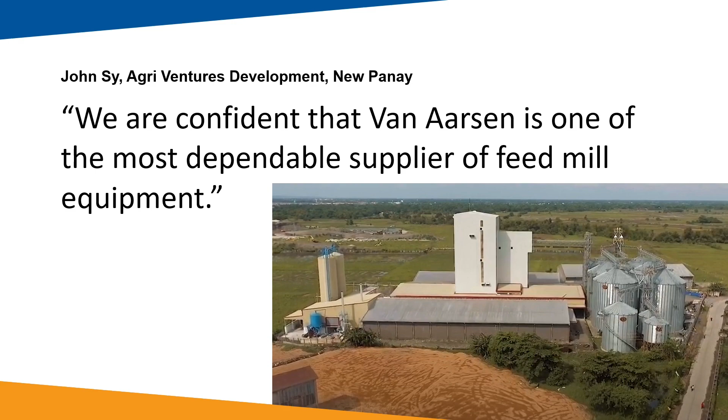For Van Aarsen, research and development is crucial, and it's in our core, it's in our DNA, as mentioned earlier, and it ensures we constantly are up to date on technical, nutritional and animal welfare developments.

With me is Harold Schroijen, Area Sales Manager South, Central and Eastern Europe, with over 20 years of experience at Van Aarsen. Together we will have a look at the latest changes, updates in the portfolio of Van Aarsen. Harold, welcome. Thank you. Can you tell us how we extended and adapted our portfolio?

That's the question. In the feed milling market, we don't see many changes with completely new developments. But due to pressure on price, use of alternative raw materials, developing markets, use of energy, but of course also on product quality and animal health, we as a solution provider have to keep on developing, not only to meet and support that market from our clients, but also be ahead of it.

So that means not only thinking along with the clients to enable them to produce their feed in the most efficient and most economical way, but also we need to meet their demands and take them as our starting point. That's thinking along with the clients. They need optimized feeds, animal feed conversion rates, and they need to have the right feed according to the animal's needs in every life stage.

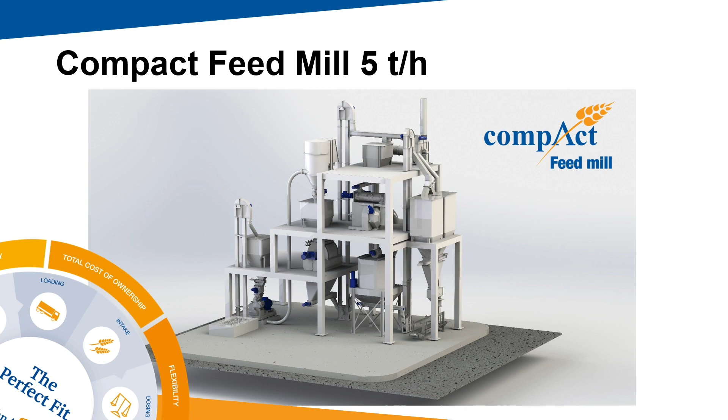So next to that standardized equipment inside, we also have some extra standardized options to make it custom for each client and every product demand. Due to that detailed execution and a bolted construction, it is also designed to be able to relocate it. So if it turns out, for example, when the sales market is reacting positively in that area, and it justifies a bigger feed mill, then you can relocate it to a new location.

Or when the opposite turns out, that it has become clear that another location should be the better one for this, you can easily relocate it again. But of course, when it turns out that it's a keeper, there is also still the possibility to enlarge the capacity because it's not limited by its own design.

And it looks compact. To get a grasp how compact it is, do you know some height or footprint by heart?

Good question. It fits in a warehouse. Let's say the 5 tons an hour, it's about 12 meters of height, so that's really low actually. And I think the 10 tons an hour would fit in a 19 meters high building, so that's also not that big for a 10 tons capacity feed mill.

Yeah, indeed, that's why it's called compact feed mill. Correct. So from this total solution we offer, let's talk about some process solutions.

And in the heart of every loved feed mill, the hammer mill beats. Let us have a more elaborate look at the grinding process. Yeah, that was nicely said about that hammer mill that beats in every heart.

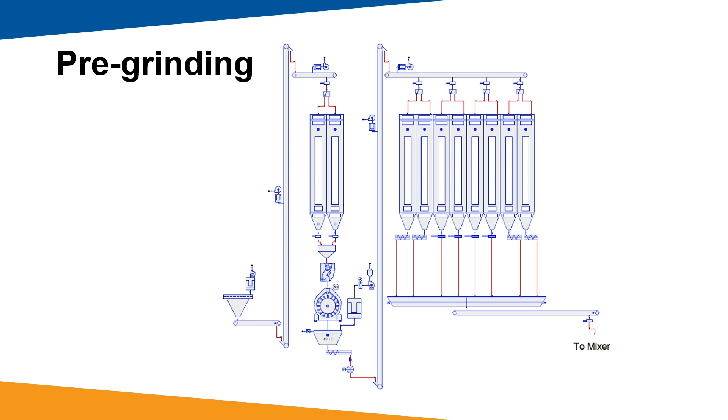So if we look at that in general, we have possibilities. Let's say in a pre-grinding setup of a feed mill, we have the possibility to grind on components particle size, and we can combine everything we need on nutrients value. But in a post-grinding setup, which is actually most used in the market, we don't have that possibility in a normal way because everything is dosed in a batch and ground on the same screen.

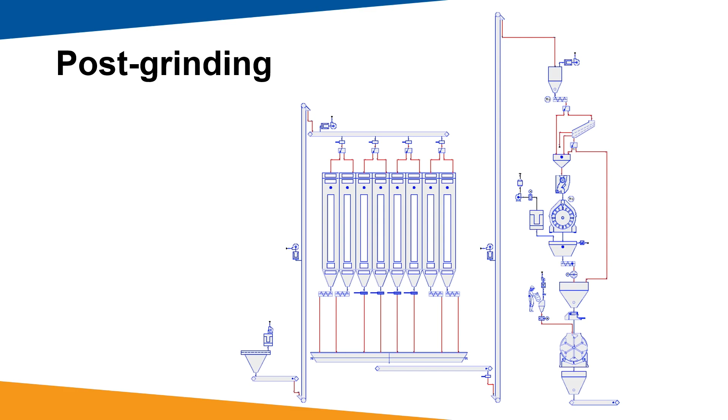So to be able to combine the best of both, Van Aarsen developed a third option, called split grinding. In short, split grinding means we take the advantages of both: from pre-grinding, the single product grinding, and on the other hand, we can still do that in a post-grinding setup, with its own advantages of combined grinding on that hammer mill. So we have two options in that split grinding, depending actually on available space, but also on investment possibilities.

And the nice thing is we do that in that post-grinding setup, and the only thing which is different is the unloading bin under the dosing weigher and the use of the automatic screen exchange on our hammer mill. So that takes us to the split grinding, where what we actually do is split up each recipe into two separate sub-batches.

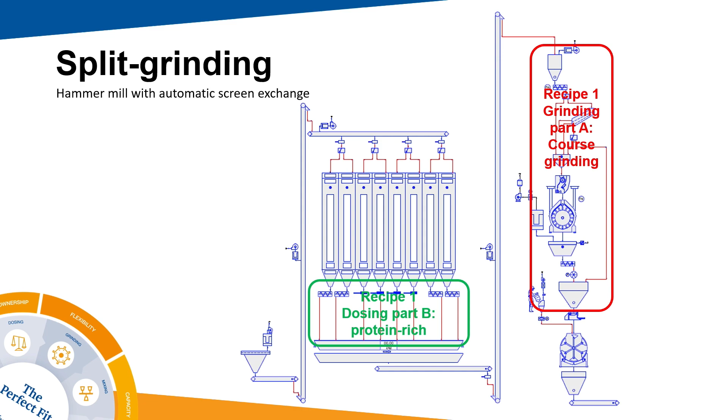And we send them one by one to the hammer mill within the same normal batch time. So first we combine from a recipe in a dosing weigher all the carbohydrate-rich products into a sub-batch, and we send it to the hammer mill with a big screen for coarse grinding. Meanwhile, the protein-rich components are being dosed, and in the time between the two batches, the automatic screen exchange switches screens for the fine ground product. So you don't lose any time in this.

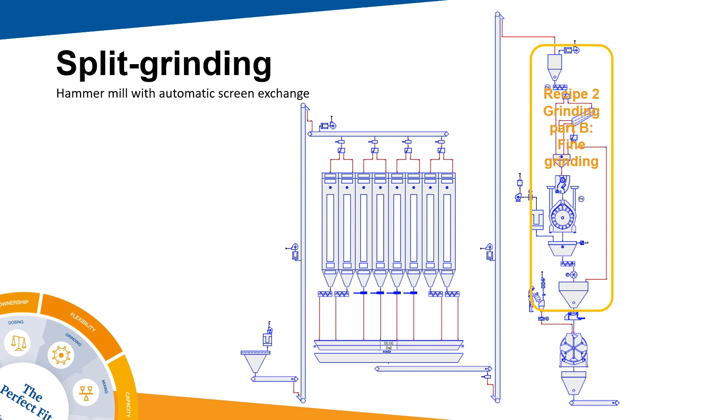And in the following bin above the mixer, both sub-batches come together again and will be mixed homogeneously. So normally you have, let's say, a 6 minute or 5 minute batch time, and here it will all be combined in two sub-batches, still having that same batch time of 5 minutes in total. So the nice thing about that split grinding setup is that it fits in a lot of cases, and it can be done in an existing situation basically with the use of that automatic screen exchange.

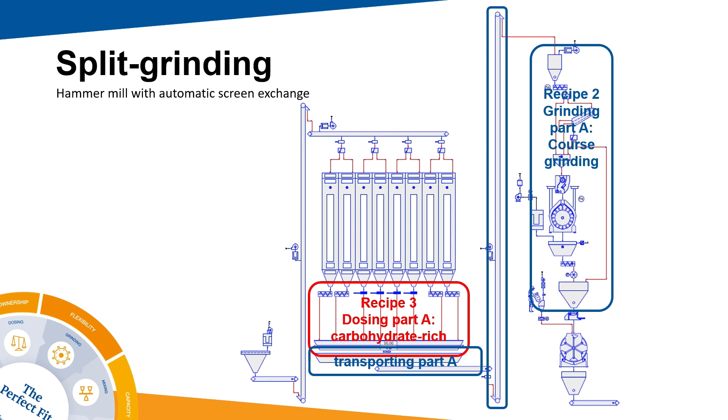So as we see here, only the setup with the automatic screen exchange. The second option is to use the automatic screen exchange or the hammer mill for the protein-rich components, and the roller mill for the carbohydrate-rich components. Investment costs are higher, but still the sub-batches are used, so functionality stays the same.

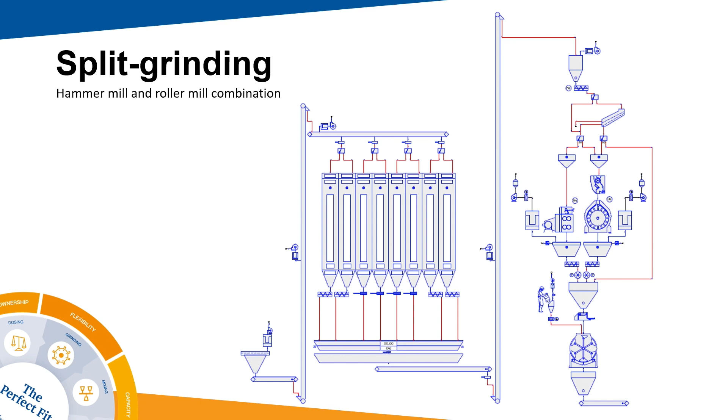I understand the advantage of this for the nutritional value of the feed. But I can also imagine this split grinding setup is not for every feed miller. Do they have to do something? Does it mean there are no options for them in terms of split grinding?

Yes, of course, still there are. And I also know split grinding cannot be done for every feed mill, not for every feed miller, but this is a nice option to have. And it is also possible to adapt in a normal post-grinding setup.

But also with a normal post-grinding setup, you have possibilities by using that hammer mill with the automatic screen exchange. So let's say they need flexibility. In a time where each farmer would like to have a separate feed for his animals in a certain life stage, flexibility is a must.

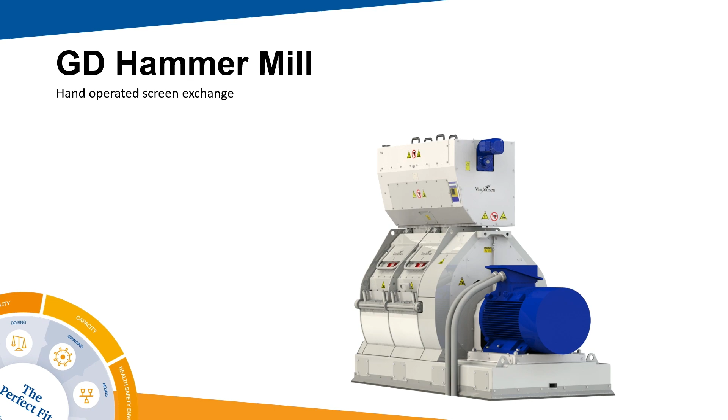So with that automatic screen exchange, we can serve that. The only thing is that we need to put it on. And if we have a standard hammer mill and we would like to adjust it with an automatic screen exchange, that is possible because its footprint stays exactly the same.

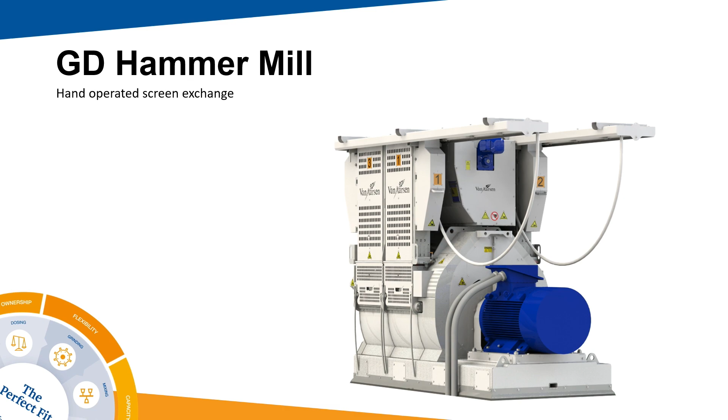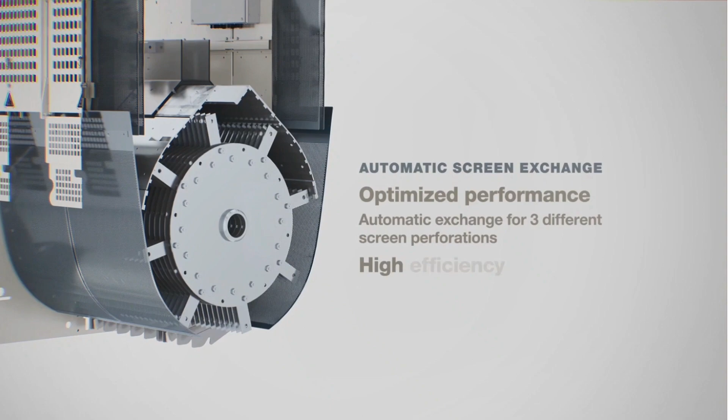The same footprint, the same height, and you can continue working with it in a very flexible way. That automatic screen exchange has 3 screens coming from the top, recipe controlled. That means within the batch changing time, you don't lose any production time with it. It's always the preferred screen perforation, getting the optimum nutritional value of the feed for its animals. So it's 100% flexibility to your clients.

So also here, for normal post-grinding systems, if you use a hammer mill with that automatic screen exchange, you combine it with a frequency controller on the motor, and you have a sieve, for instance, on top of the hammer mill. You also have perfect possibilities for structure grinding, even in a post-grinding setup.

Okay, but some feed millers might say, I combine my recipes on one screen and the operator is there anyway, and I don't need it, and I don't change the screen that much or that often. I can imagine that's said. I also hear the story sometimes, but I know also for sure that if you don't need to think about all these points, life will be a lot easier and quicker, also because it's easier and you have better results in more precise grinding products.

So think of only the capacity increase if you don't lose any time by switching the screens. And even switching the screens only once will take, let's say, 10 minutes. So let's make a careful calculation, but simple, but careful. Let's see.

If you have a grinding setup and you only shift it once every 2 hours on a 24-hour production day, that's not that much. So 12 times 10 minutes you earn is 120 minutes, is 2 hours of extra production time. That's really a lot. And if you then imagine that the capacity of the hammer mill will be 40 tons an hour, then you gain 80 tons per day of extra product.

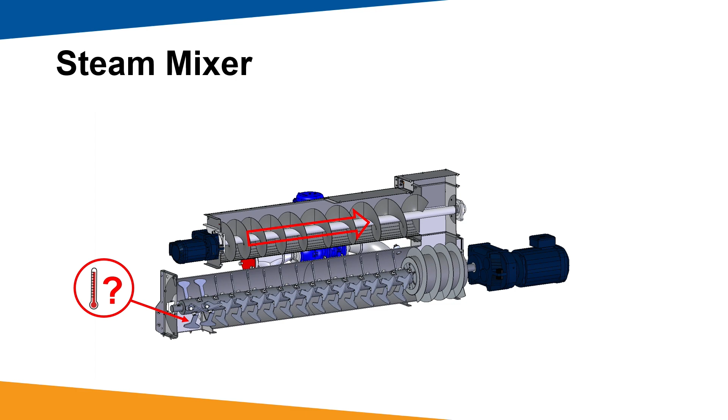Let's check the fast product changeover. The final product from one batch is coming down from the dosing screw to the pellet mill, while in the second pellet mill bin, the next recipe is already waiting for the signal to start. What we see is that the product entering the steam mixer, because there is no intelligence in the steam dosing, the first product most probably will be too wet, because steam dosing is starting too early, or it's too dry. Both options are not preferred.

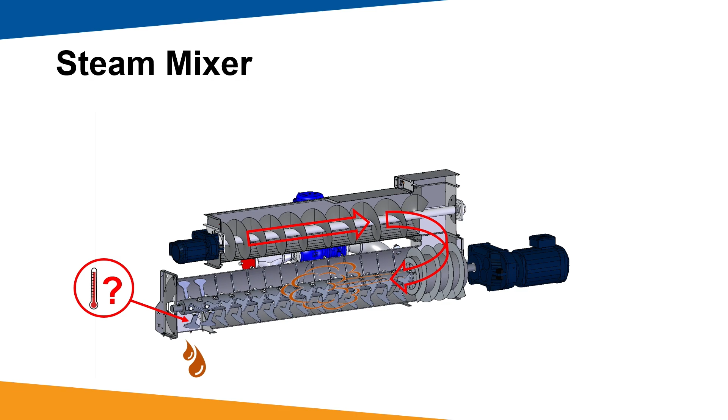So we looked at some intelligence for that, and our automation guys did that for us. They made the predictive steam dosing, which means we use all parameters available in the pelleting line to be able to predict how much product is entering the steam mixer at a certain time. Then also the first product has its heat treatment before it exits the steam mixer and goes to the pellet mill.

Even in a normal situation with a normal steam mixer, this is possible. But you can imagine when heat treatment is mandatory, then you need to be 100% sure that all product had its heat treatment. For that, we suggest using the hot start steam mixer. That hot start steam mixer is a bit different because we close the exit of the steam mixer with an actuator operated slide.

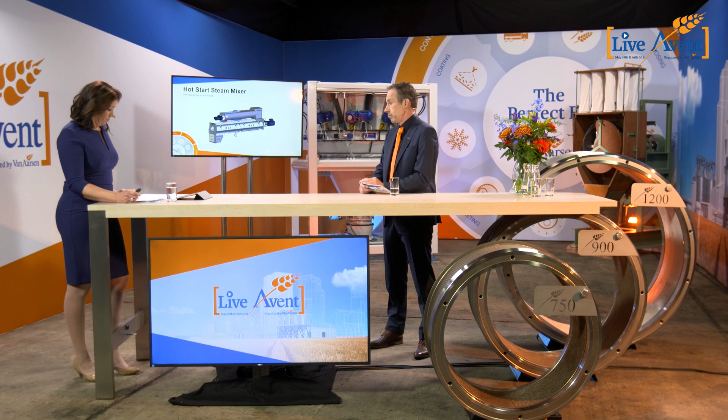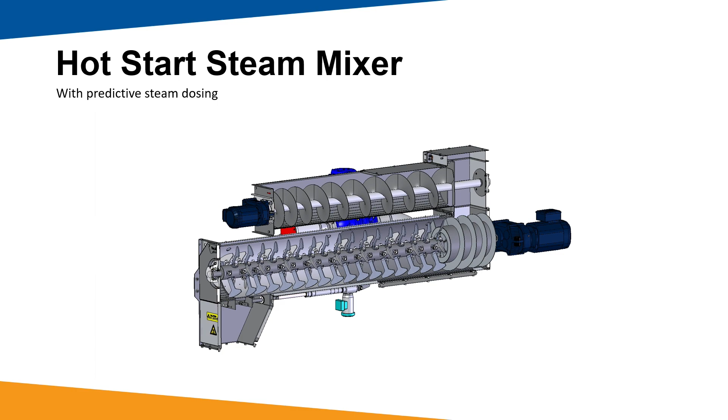As soon as the product starts, we see that it's coming from the dosing screw and goes into the steam mixer. The slide is closed, product comes in, and then the automation knows okay, there is so much product inside the steam mixer, so we can start dosing that steam at a certain amount.

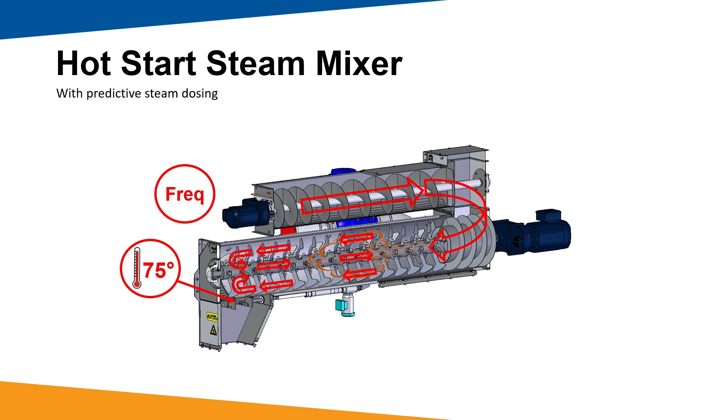Because the slide is closed, the product goes up and down in the steam mixer until the average temperature at the end of the steam mixer is at the right level. That's what's happening with this hot start steam mixer. As soon as that temperature is reached, the actuator operated slide opens slightly, just enough for the capacity at that moment, and then it operates again like a more or less normal steam mixer.

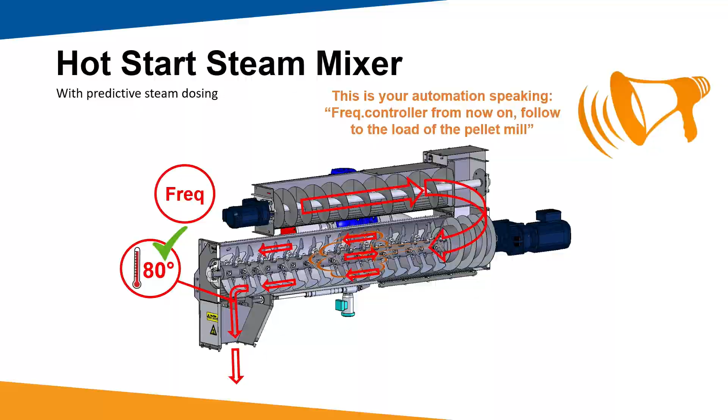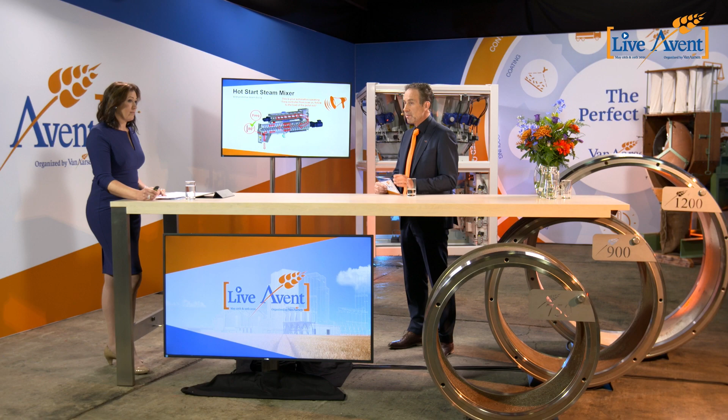But what I'd like to say about this is that also here, with this fast product changeover, we know for sure that all product has its heat treatment before entering the pellet mill. And because of this short time, we can save 30 to 50% of the startup time. If you make a small calculation for that, we can see that there's a lot to gain just from this simple development in the pelleting line.

Let's see if we can make a calculation. If we take only one product change in an hour, so you have more batches, but one product change in an hour, and instead of 10 minutes startup time you do it in 5 minutes, just from that you can gain 5 to 8% of extra capacity in your line.

Yeah, that's really a lot. Also if you think in the big numbers, it also has a very short return on investment.

Taking us to the next subject of this live stream, which I'm quite excited about. How about you? Oh yeah, I'm excited all afternoon. Me too. So the product launch, because we covered the grinding line, we covered the pelleting line, and now we come to what we were all waiting for, I hope.

In this rapidly changing and growing market, we see there is a strong demand for high capacity. And with pride, we present our new line, the Titan line. Let's have a look.

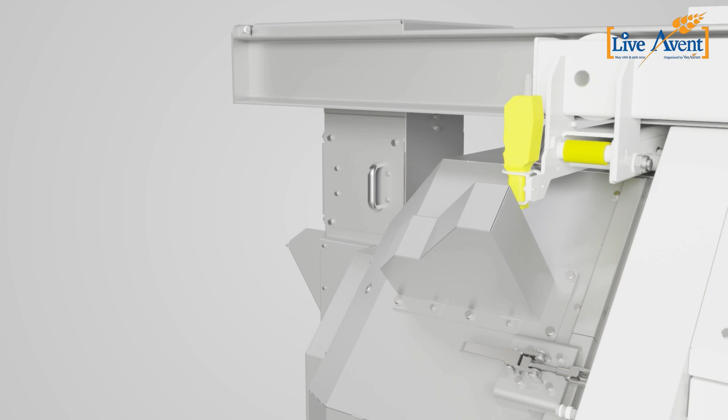Wow, the Titan line, being our high-capacity conditioning and pelleting line, with at its core the pellet mill, the CU1200.

Harold, why this impressive addition to our pelleting portfolio? Yeah, we see from the past that we only developed bigger and bigger pellet mills. If you see the small pellet mills in the past, over the years they grow from 500, 600, 750, 900, then why stop there? Even with emerging markets and bigger capacities, mostly for integrating companies with a few recipes, they need continuity in the line to make it highly efficient. So that is really what it's about, and we thought okay, we need to serve that market as well, because we see it's getting more and more common.

And as you mentioned, pellet mills grow. So we put some dies in the studio to show you the growth, and for some people who were paying attention, it was there all the time. That is really an impressive size, Noura. If you see this big die for the Titan pellet mill, it's really big. Yeah, more on that later.

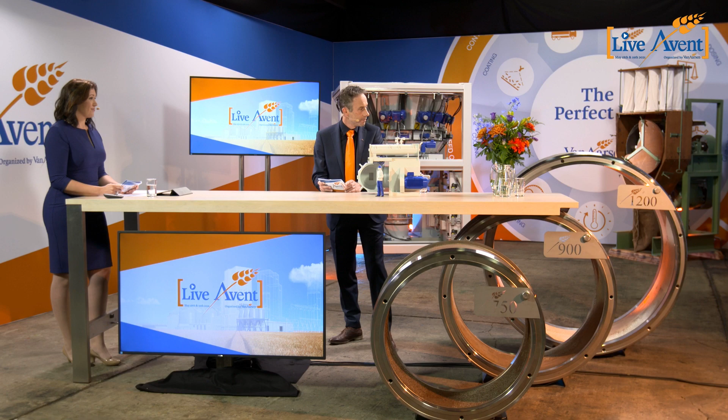As you said, pellet production in the feed mill is generally the most energy-consuming step in the whole process, and in an already competitive market, efficiency is key. Yeah, of course. But besides energy efficiency, we also must look at efficiency in maintenance, changeovers, and die changes.

So with this, we took everything into account for developing this new pellet mill, this new pelleting line. Everything is taken into account to make it efficient and still energy efficient, but we thought over the other efficiencies very well too. The whole package, yes.

Let's talk about that pellet mill that you have there in 3D print. What makes this one stand out?

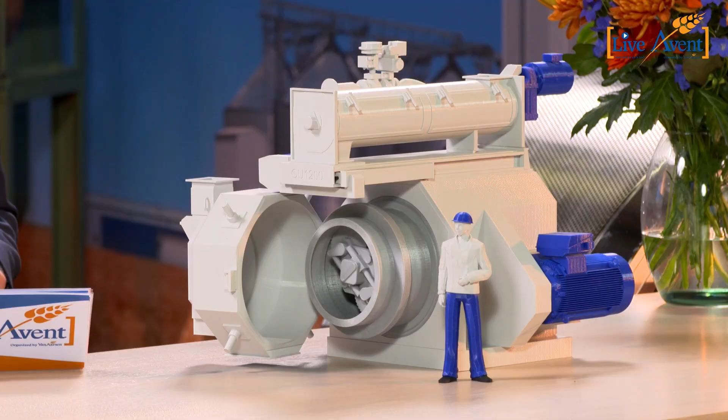At first I would say we have to look at its design, because this design is based on the know-how of our company, our engineers, our developers, gained in 50 years of producing pellet mills. So we made some changes, but also took the nice parts of the other ones and added some new things. Everything that was good on the others we used, and we also added new things. You already saw that in the animation.

There are too many things to mention, but the only big difference you see is that we used a twin drive system with two separate motors. This is really new for us, made in a completely new way you don't see in the market. We use two motors because one motor is extremely big, and now these are two standard motors which are more common to use in the market, so it's easier to get them supplied.

Also, if you look at the die, it has a very big effective die surface of 1.5 square meters. That's really a lot, Noura. Yeah, that's really a lot — that's the largest in the market.

That's really a lot. Yeah, and also here, the ease of operation and the ease of maintenance — the maintenance access points, the simple but also inexpensive tools, these are all taken into account in the production.

Together with the automatic roller adjustment, you have all the flexibility in your production process, and you can also maintain it well and keep it running efficiently, because a lot of product goes through that pellet mill. That's really nice to see.

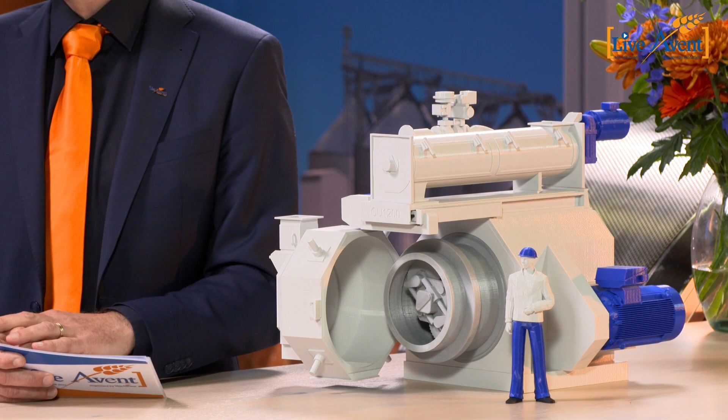And if you look at what we calculated, with all the points ahead, we can go up to 8,000 production hours a year, at up to 70 tons per hour. That brings us to lowering the production cost down to a bit more than 3 euros per ton, and that's where we make the big difference.

So this Titan pellet mill enables our clients to produce the best possible feed in the most productive and economic way. We already got some questions about it. Okay, please fire off.

We have a question about the slow turning device and the hoist trolley, whether they are included in the basic version. The hoist, yes — you see it here in the 3D print. It's standard, and you also saw that in the latest movie. That is included. So the hoist and the slow turning device — yes, that is also included, because it comes from the twin drive system, which is frequency controlled, so we use that drive system also for the slow turning device.

So that is complete with the automatic roller adjustment — it really gives some extra tools for quick die changing.